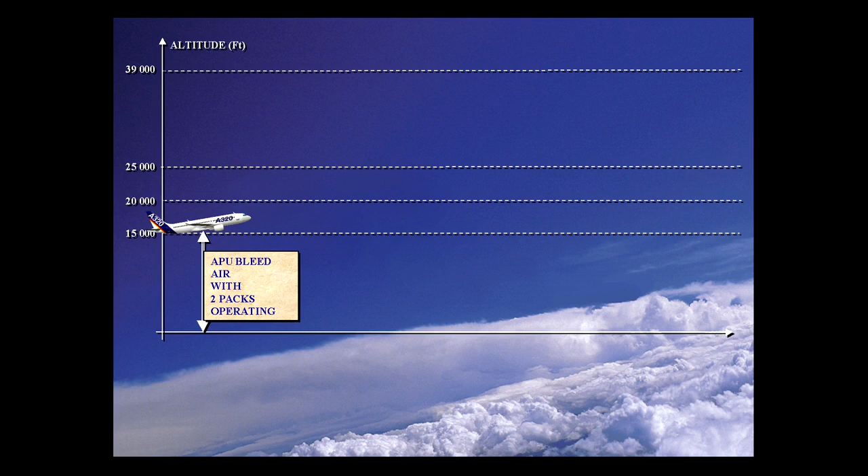With both air conditioning packs on, the use of the APU for bleed air is limited to 15,000 feet maximum. With only one pack on, the use of the APU for bleed air is limited to 20,000 feet maximum.

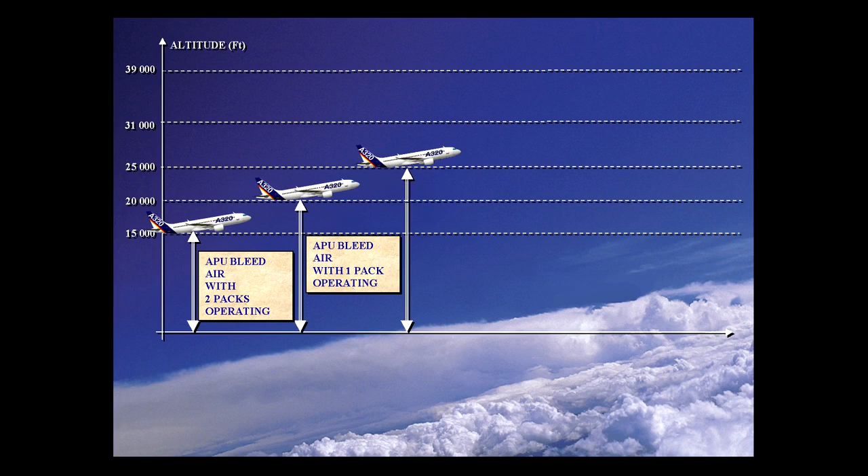The APU can be started using batteries up to 25,000 feet. The recommended maximum altitude for APU start is 31,000 feet. This is not a limit, however. You can start the APU all the way to the max ceiling of the aircraft, 39,100 feet. Electrical power from the APU can be used all the way to the max ceiling of the aircraft.

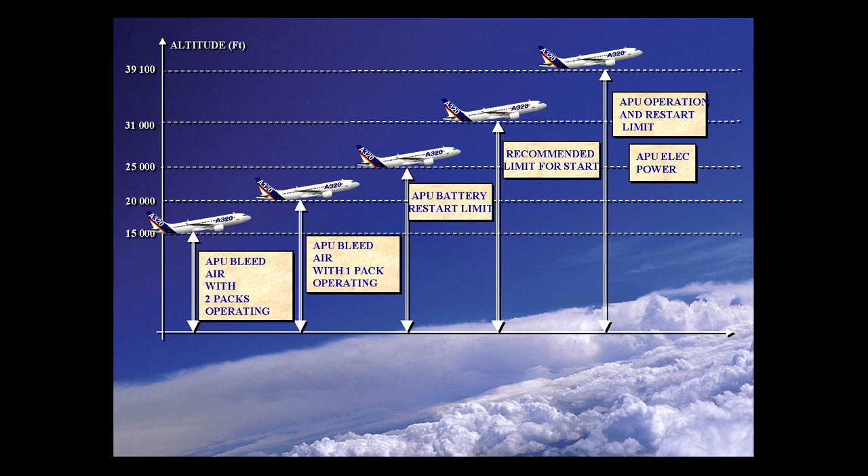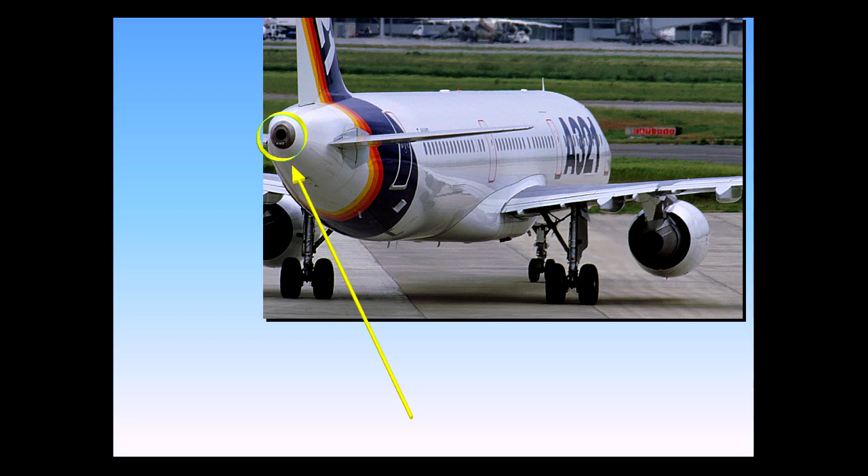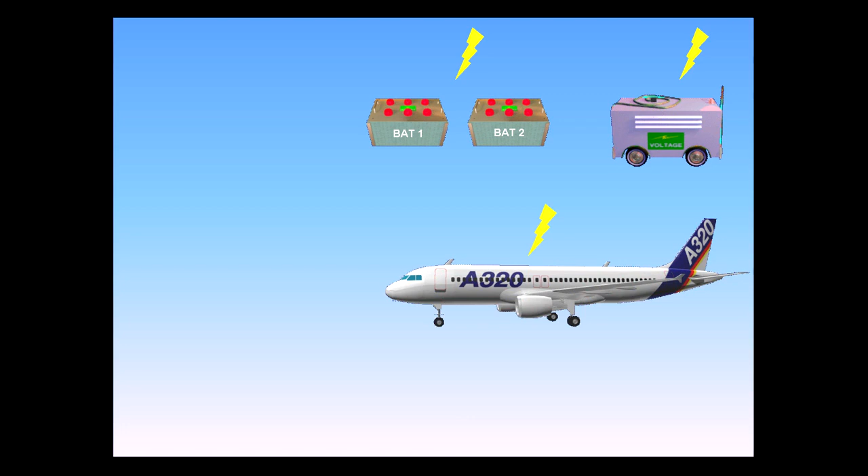The Auxiliary Power Unit, APU, is located in the unpressurized tail cone. It is a self-contained unit which can make the aircraft independent of external pneumatic and electrical power sources. The APU may be started using the aircraft batteries, an external power source, or the normal aircraft AC power.

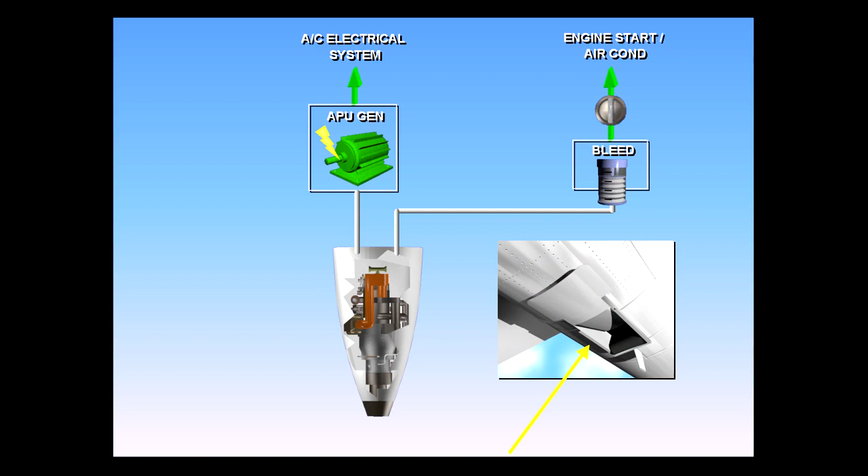The APU has an air intake flap, which, when it is open, ducts external air to its compressor inlet.

In the cockpit, you can monitor the following APU parameters on the ECAM APU page: EGT and compressor speed, APU bleed, APU generator, flap position.

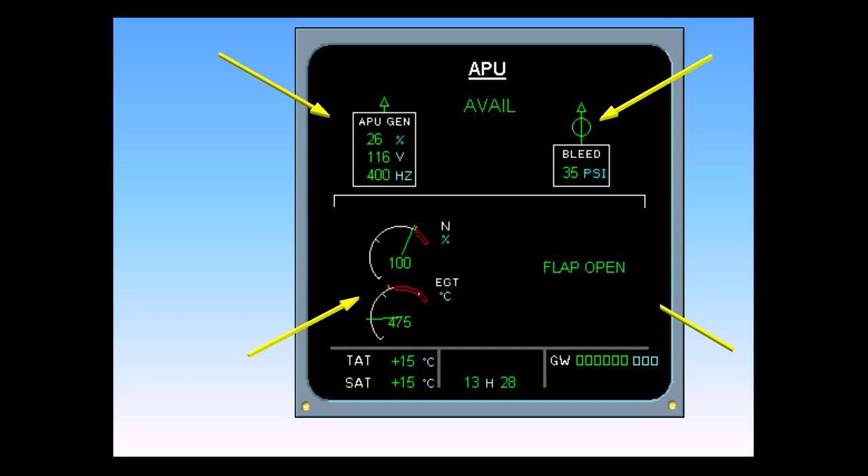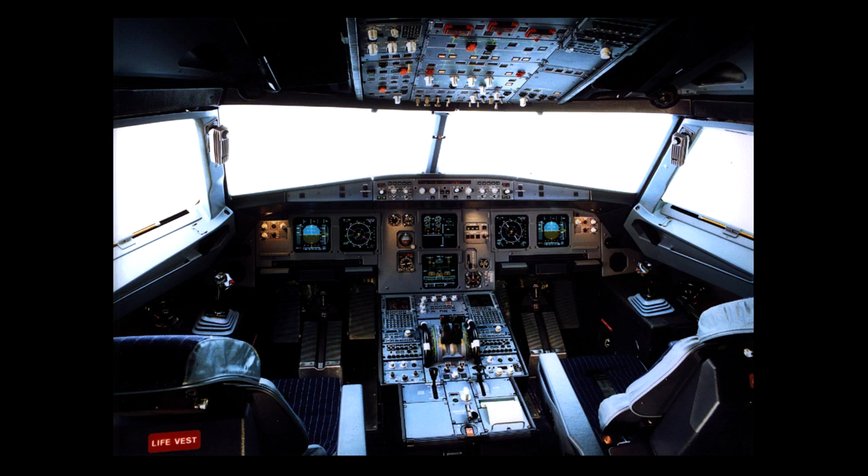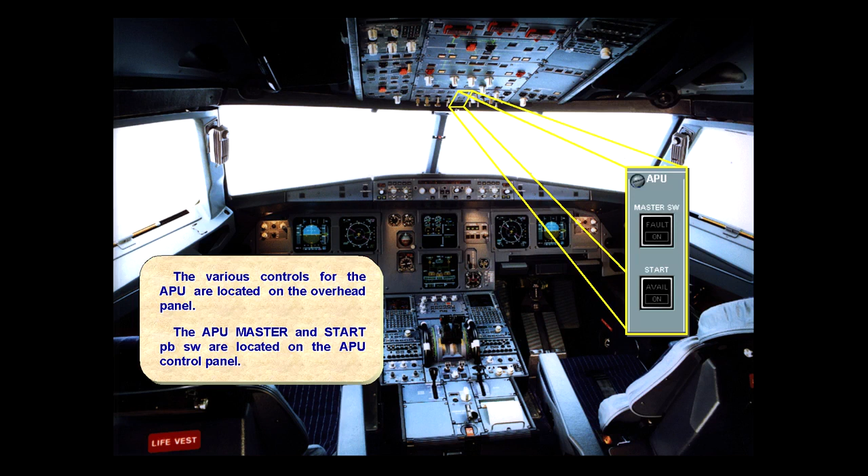The various controls for the APU are located on the overhead panel. The APU master and start push-button switches are located on the APU control panel. APU fire controls are located on the fire panel.

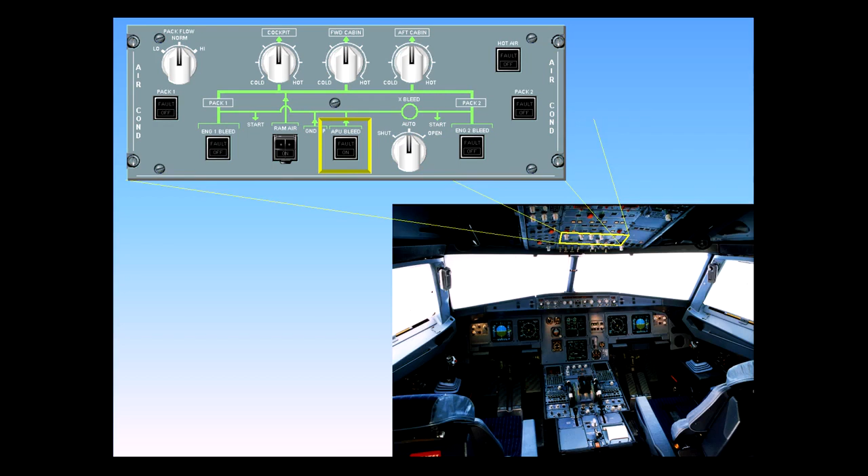The APU bleed switch is located on the air conditioning panel. It controls the APU bleed system, including the automatic function of the cross-bleed switch.

The APU generator switch is located on the electrical panel. In the normal lights-out position, the generator is automatically controlled according to the electrical priority schedule. When deselected, the switch turns the APU generator off. The APU generator is activated by switching off other power supplies.

The electrical priority is: 1. Any engine-driven generator, 2. External power, 3. The APU, and 4. The other engine-driven generator.

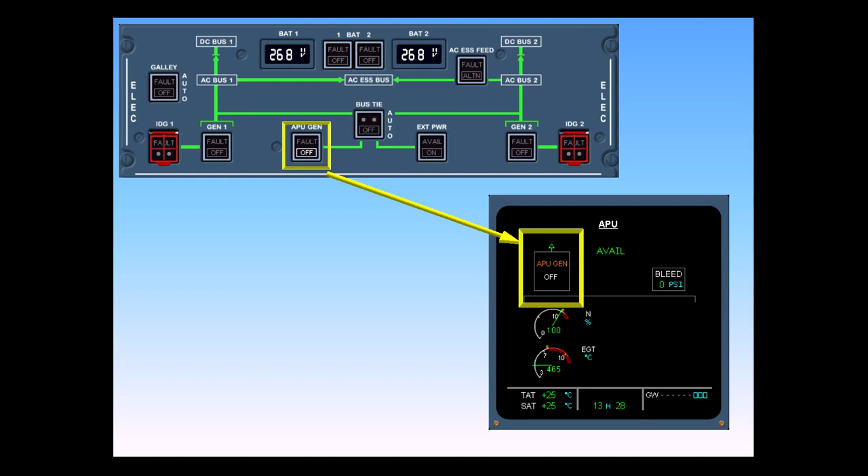There is also an APU shut-off push button and an associated APU fire warning light, located on the external power panel. This panel is located in the nose gear bay.